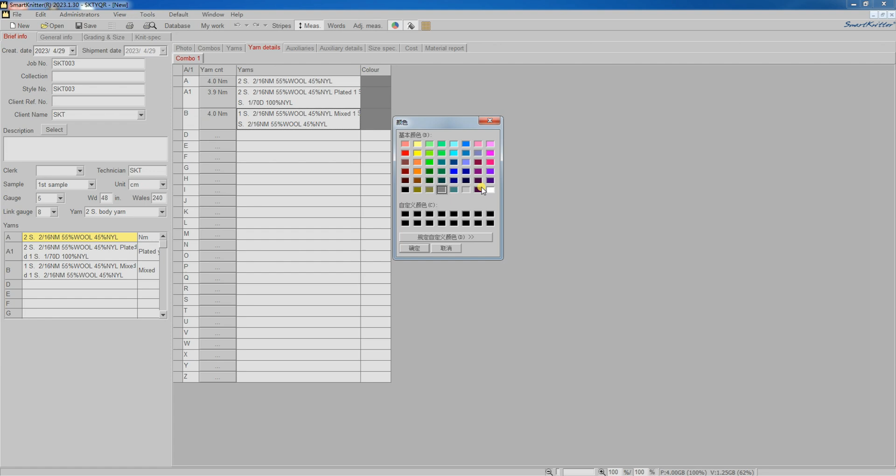The third yarn combo is a combination of yarn 1 and yarn 2. We could set different colors for the yarn combo for easier identification.

Input measurements in Size Spec tab.

Fill in information in General Info tab.

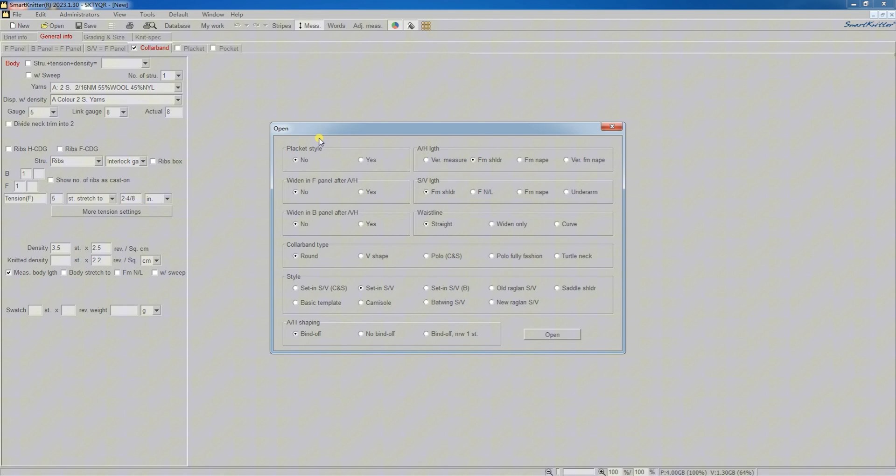Select Template for our knit spec. Let's save our progress.

As this style is sleeveless, we could hide the sleeve panel at View and uncheck Show Sleeve.

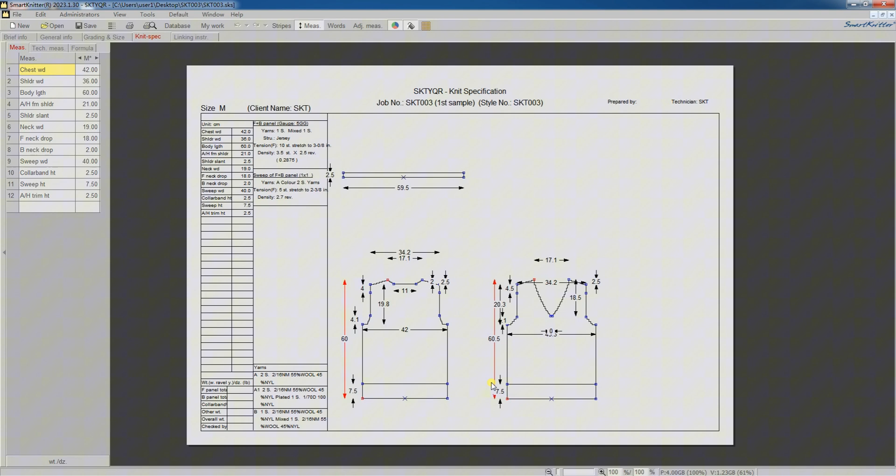Let's start editing the knit spec of the back panel by checking chest width. Delete the intersection point for the sleeve end, as this knit spec is sleeveless.

Add horizontal formula for shoulder width. Use measurement at relevant positions.

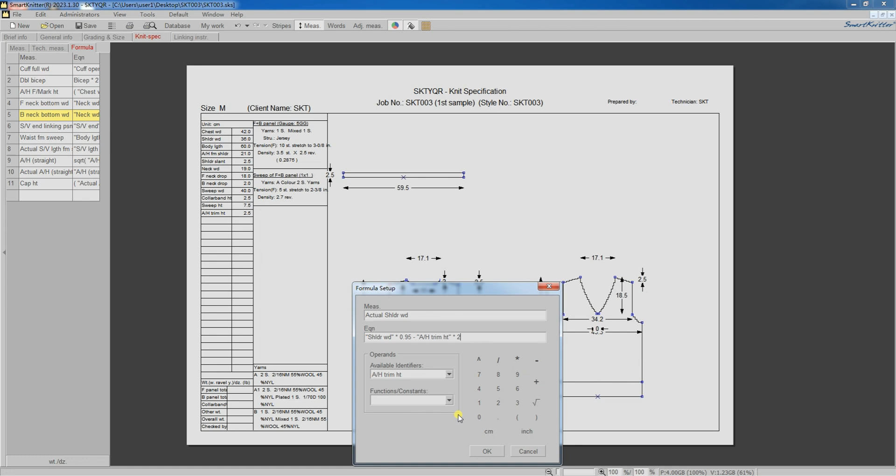Check neck width and back neck bottom width. Make necessary changes.

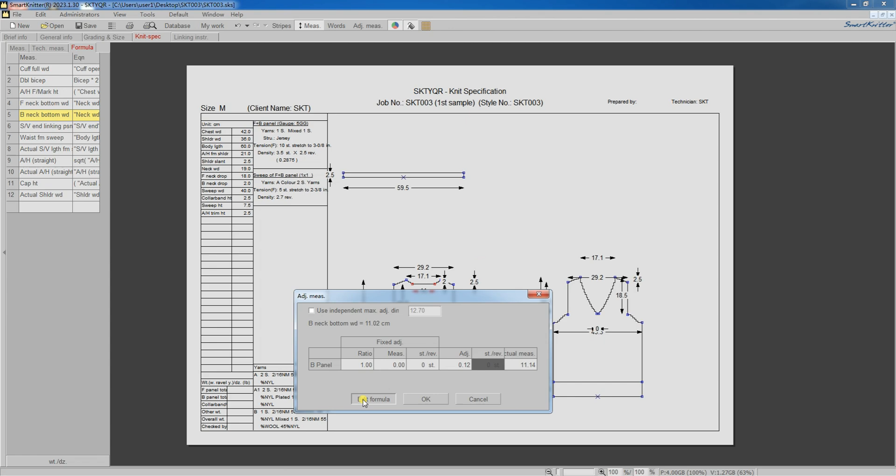Add adjustments and formula for body length, armhole depth, and armhole fashioning mark height.

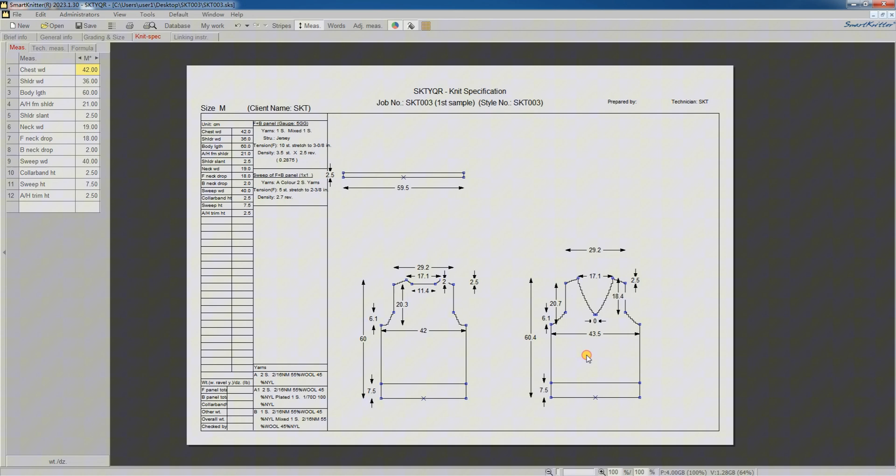Cancel all irrelevant adjustments and move on to knitting rules.

Let's start with back panel sweep. Fill in the number of revolution and yarn for plaiting.

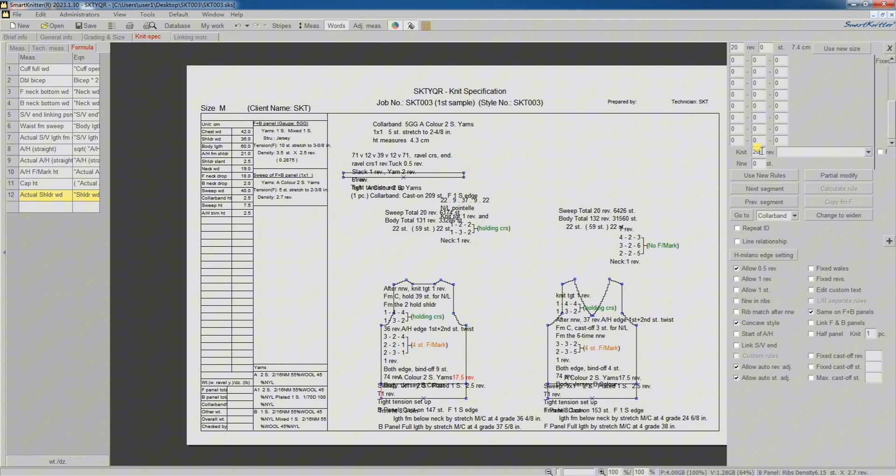Make sure to check Allow 0.5 revolution. Check Allow 0.5 revolution for this segment as well. And knit odd number of courses to make sure the yarn carrier goes back to the original position.

Input the number of stitches and select position for narrowing. For interlock gating setup, we recommend doing narrowing at the last course of sweep.

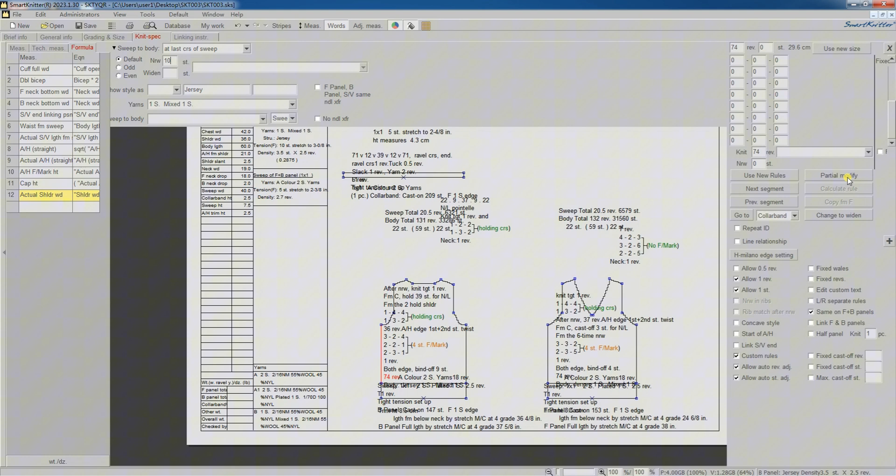For rib gating setup, we recommend doing narrowing at the first course of body to prevent transferring multiple loops at the same time.

Continue to edit the knitting rules accordingly, as demonstrated in previous lessons.

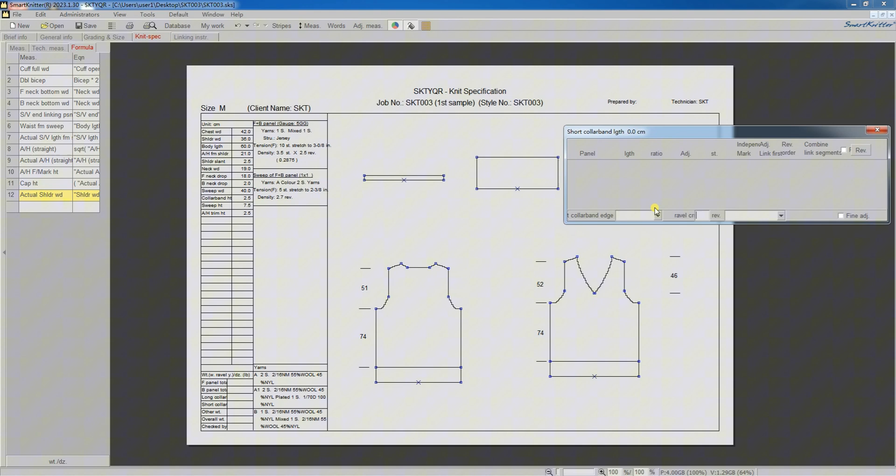Click on the line segments on front and back panel in the order where it needs to be linked. Set the measurements of the short collar band.

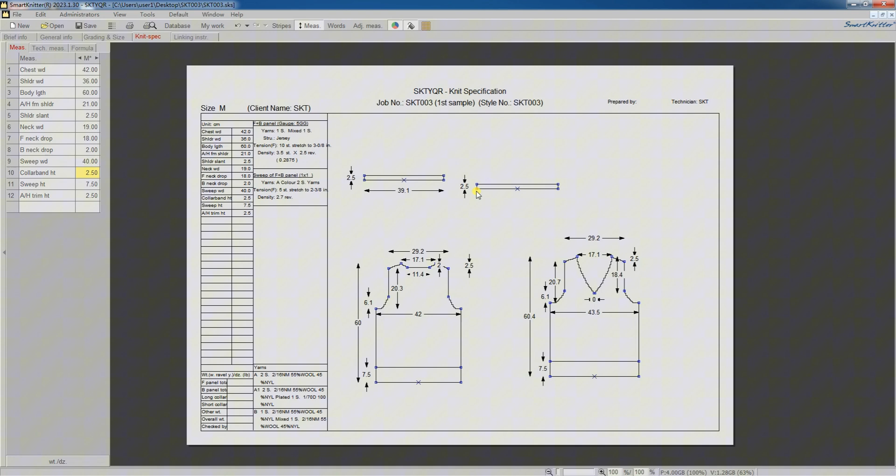Right-click on the long collar band's top line segment and select Edit Trim Link Segment. Check the segments selected and choose the appropriate linking markers.

The seam line for this order's collar band is shifted towards the back panel by 4 stitches. Input the adjustments accordingly.

Make adjustment for the short collar band as well.

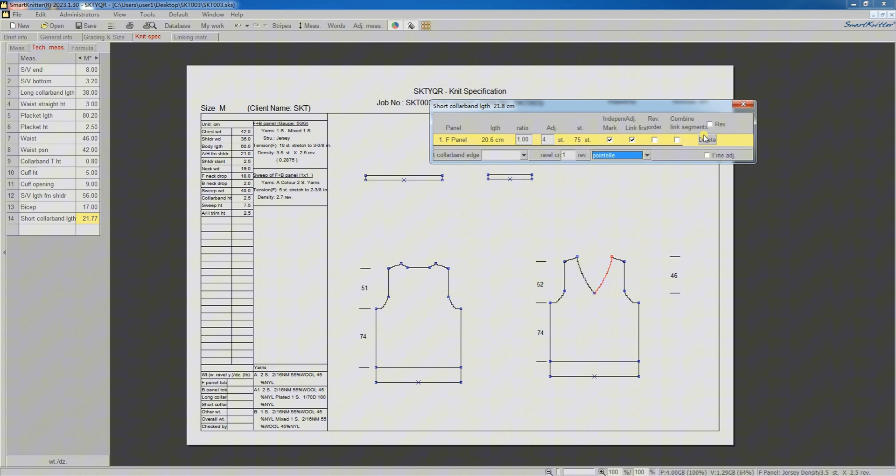Let's move on to the knitting rules for the collar band. Edit the knitting rules accordingly.

Check long collar band, short collar band, same setup.

Edit short collarband's knitting rules.

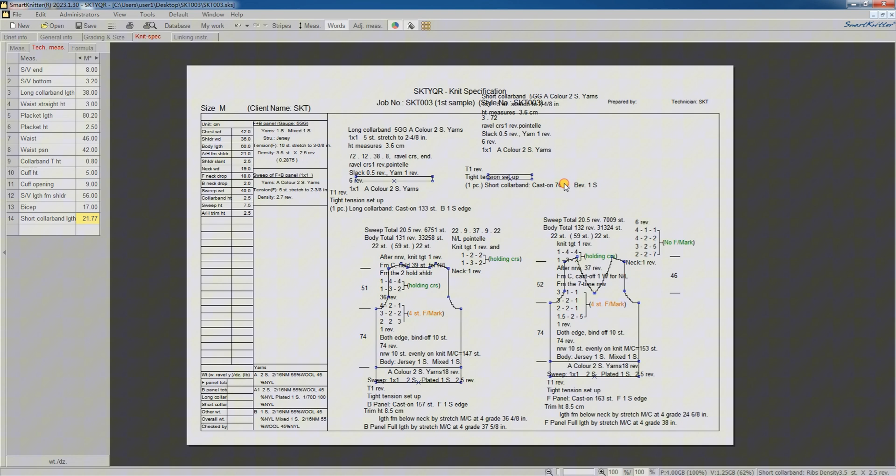Tidy up the canvas and save the progress.

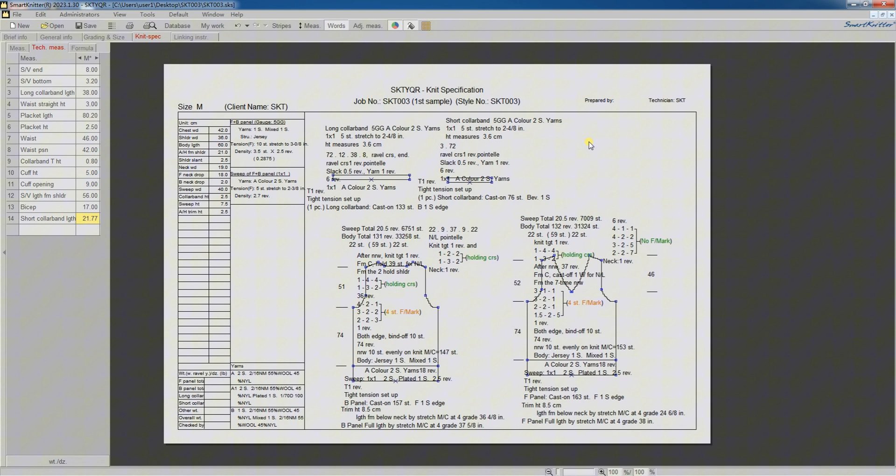Last but not least, add armhole trim panel. Edit its setup in General Info tab.

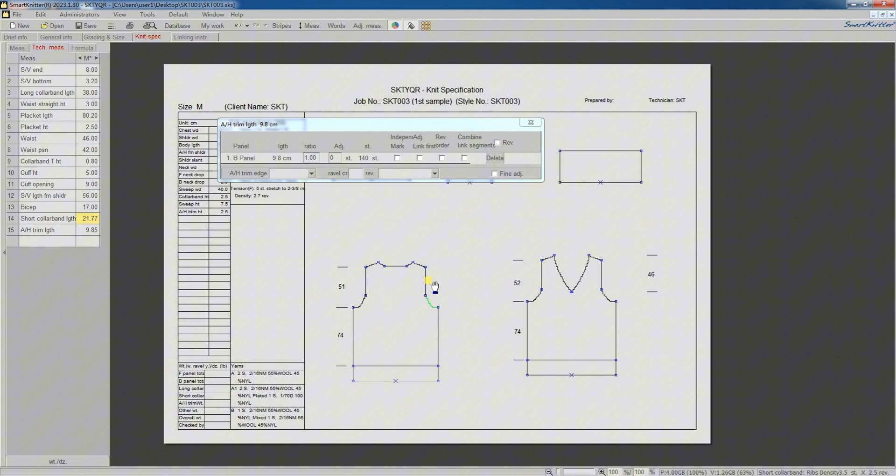Right-click on its top line segment and select Add Trim Link Segment. Select line segments of front-back panel in their linking order, and select appropriate linking markers.

Edit the measurements of the armhole trim.

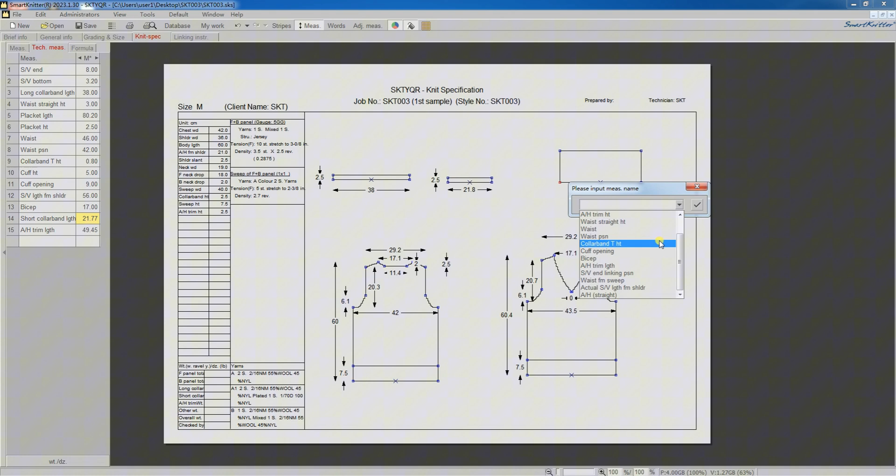Edit its knitting rules accordingly.